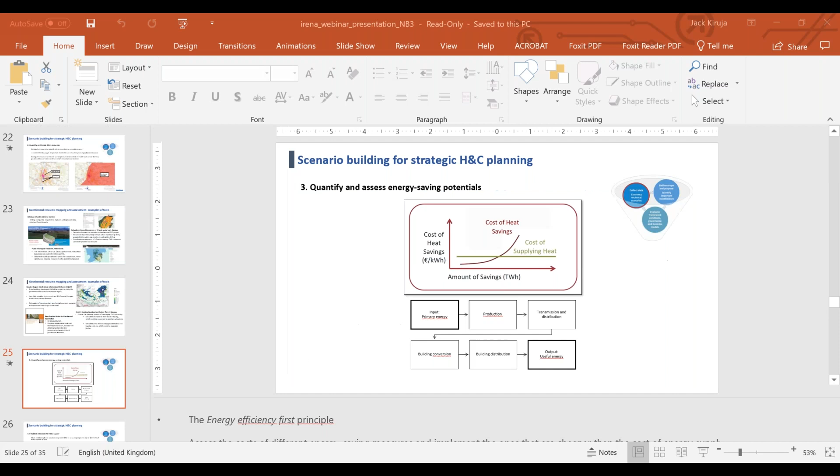As my colleague Gurbuz underlined, today's focus will be on the success factors for effective strategic heating and cooling planning. This is a crucial first step for integrating renewable energy resources, such as low temperature geothermal energy and solar thermal, into district heating and cooling systems. Cities account for two-thirds of global final energy use and a commensurate share of energy-related CO2 emissions. Air pollution, energy poverty, health risk, and climate change are challenges associated with current fossil-based energy systems, which could increase further due to rapid urbanization. More than half of the world's population lives in urban areas today, a share expected to rise to two-thirds by 2050. In terms of energy mix, we can observe that the transition is taking up speed.

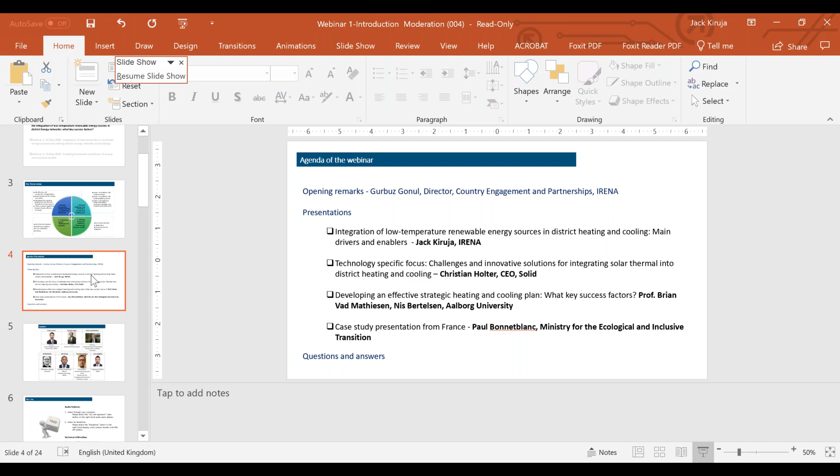IRENA's latest renewable energy statistics, released very recently, show that new renewable power accounted for 72% of all power expansion last year in the electricity sector, with 176 gigawatts of newly installed capacity. However, when we look at the heating sector, although it represents the largest energy end-use sector and accounts for over 50% of global final energy consumption worldwide, it is seriously lagging behind. As a matter of fact, at a global level, only 10% of heat is generated from renewable energy.

If we are serious about climate action and the clean energy transformation, heating and cooling require urgent action, especially in the cities context. The decarbonization of the sector is both technically feasible and economically viable. This can happen with a combination of national and local energy efficiency measures addressing the demand side, for example, by reducing heat demand through buildings retrofitting and optimization of technical building systems, and penetrating more renewables on the supply side. In this context, district energy systems are one of the ways to increase energy efficiency and scale up the use of renewables.

While reducing fossil fuel use in the heating and cooling sector in urban areas. Despite most systems still being operated on coal and natural gas, district energy networks provide promising opportunities for integrating low-grade renewable heat sources, including geothermal and solar thermal. According to the Global Renewables Outlook, just launched today by IRENA, the share of renewable energy in district heating may increase from 8% in 2017 to as high as 77% in 2050. Together with increased electrification, district energy can be a key contributor to the decarbonization of the building sector and to the transition towards a smart energy system, one that integrates smart electric and thermal grids and can offer system flexibility.

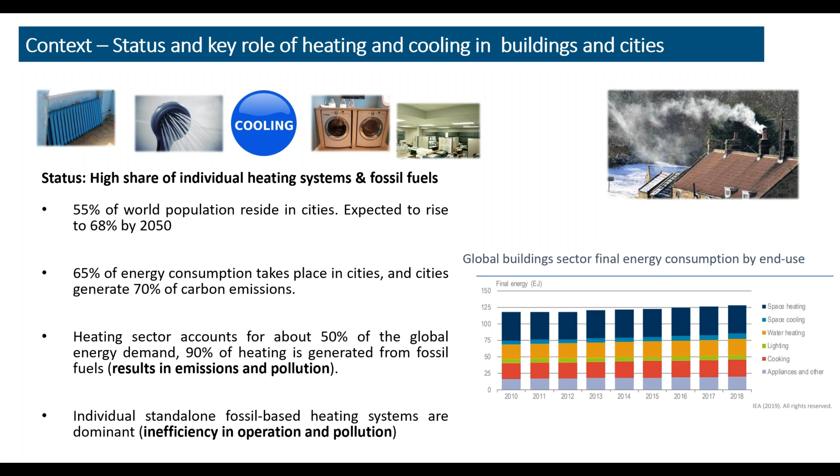Renewable energy sources such as biomass and high temperature geothermal resources can play an important role in certain limited areas, but their contribution remains negligible to date.

We see, however, a number of interesting developments when it comes to a gradual improvement in terms of efficiency of the building stock, and the development of low temperature district energy technology, running at lower temperature, which can be key enablers for a wider utilization of low temperature renewable energy sources, including from geothermal energy. These may otherwise remain unexploited.

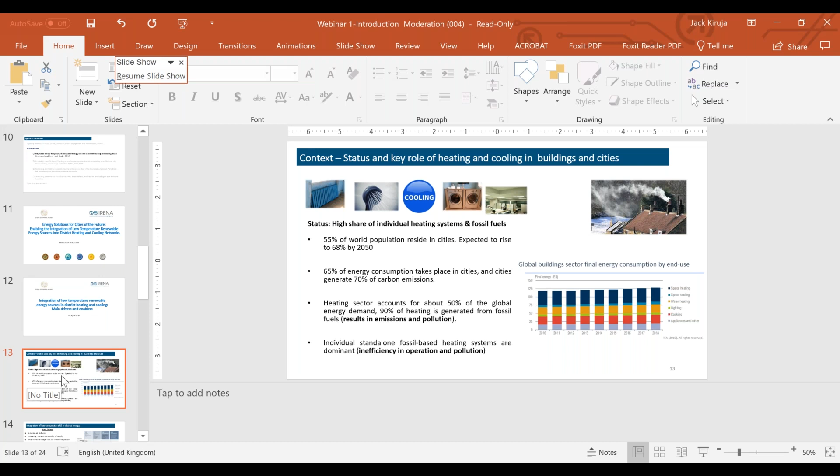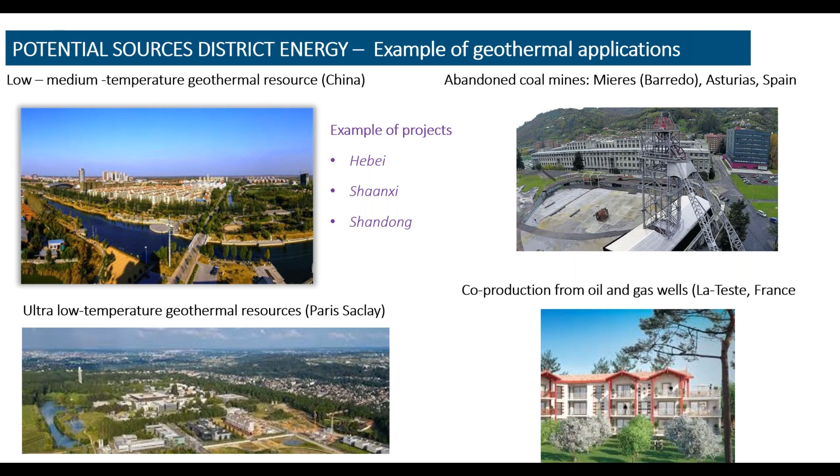They're using the resources in the shallow reservoirs through the use of heat pumps to provide heating and cooling for buildings. Another thing we're seeing is where geothermal energy is co-produced in conjunction with oil and gas, where the water is separated from the oil, and then the energy in this water is used to provide heating in the buildings.

Now, when we talk about developing district heating systems that can use these low temperature resources, we are confronted with different types of scenarios. The first scenario is where we have an existing settlement with an existing district heating system. These district heating systems are characterized by high temperature energy supply and also the use of fossil fuels.

For us to be able to use the low temperature renewables in these systems, we need to retrofit both the houses so that they're able to operate at a lower temperature, and also retrofit the district heating systems. The second scenario is where we have an existing settlement but without a heating network. In this case, we build a new heating system designed to operate on low temperature, and then on the building side, we retrofit the buildings so that they become compatible with these low temperature resources.

The third scenario, which is the easiest to develop, is whereby a new settlement is being developed. The houses can already be built bearing in mind that they're going to use low temperature resources, and the district heating system will also be developed to operate with low temperature resources. However, it's not a straightforward process.

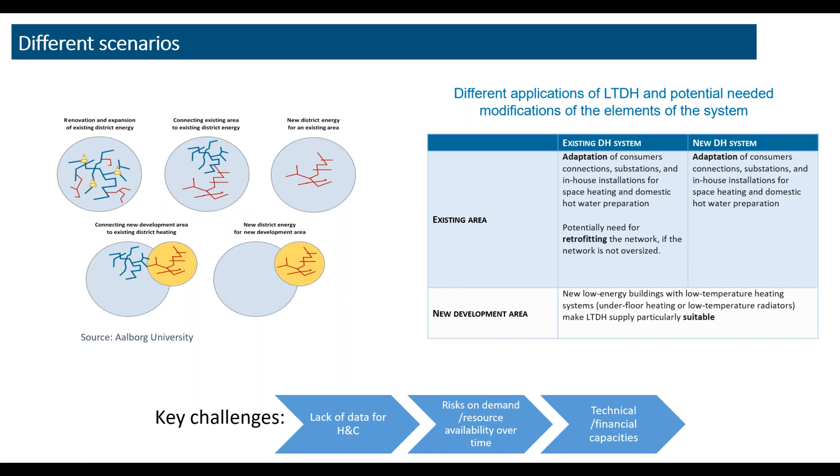As we go on with the webinar, we are going to see how some of these challenges are being addressed. Thank you.

Thank you very much, Jack. So we are ready now to have a technology-specific focus on solar thermal. The idea of our series is for each webinar to have a technology-specific focus. Today we'll have it on solar thermal. In the following webinars, we'll also focus more specifically on geothermal energy and perspectives for cooling.

We have now a presentation by Christian Holter. He's the CEO of Solid and one of the world's leading experts in the solar thermal market with more than 30 years of experience. Christian will be providing an overview of the technology applications from solar for district energy, including some challenges and solutions.

Okay, so please provide the screen to me. Here we go. Okay. You see my screen? Hello? Can you see my screen?

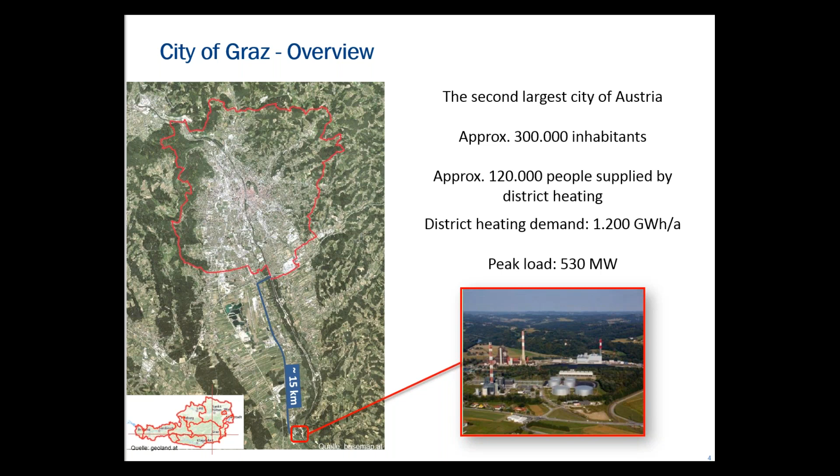But imagine you are responsible for a city with 300,000 people and many offices, business connected, and you get the message that you are losing 80% of your heat supply. Now, so in this emergency situation...

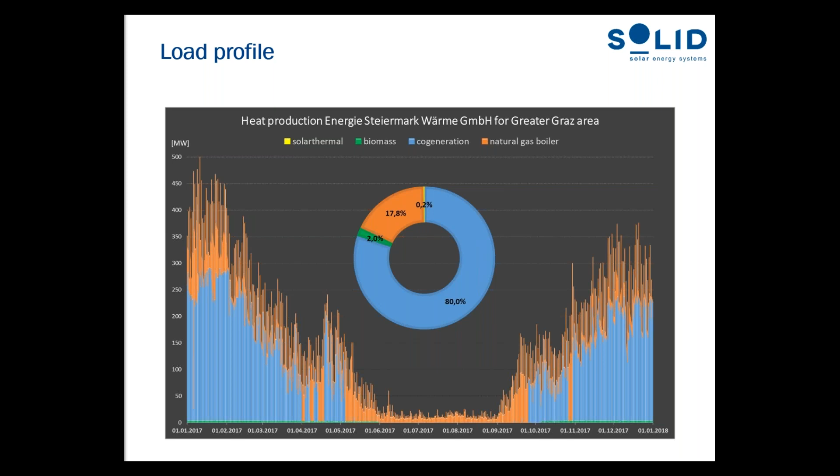The utility and the city and the local government came together and announced to form a working team. This working team started its work in 2013 to develop a full new approach for district heating.

It was done in a public process, so it was a call for contributions, and all technologies, all universities, all consultants were invited to present their ideas and concepts. It ended with 9 workshops, 150 participants, and 38 specific proposals for what to do.

Now, for sure, there were a lot of nice ideas which are close to the market. There were some ideas which are like a perpetuum mobile that don't work out. So the Graz Energy Agency worked to systematize and analyze all these proposals. 16 of them went into detailed evaluation, and as we talk today, 7 of them actually are implemented or are under preparation.

With those, this 80% of lost energy will be replaced, and the district heating system will be switched to renewables. So we have a very nice template case of coming from 80% coal plus 18% natural gas to a highly renewable system. Not everything in one shot, as you can imagine.

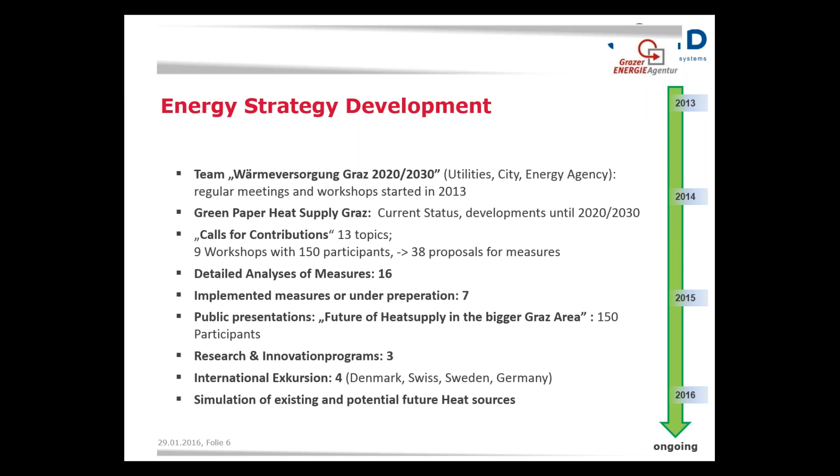So among those proposals, you can imagine there was a whole list of things we are aware about. I'll give you a little bit of the outcome of the discussion in the city of Graz on the specifics of all these opportunities.

Geothermal was off the table quite quickly. We don't have good sources for geothermal here. So it was actually not sufficient underground heat available to run geothermal.

Then there was a long discussion about heat pumps and potentially driving them by renewable energy like wind. At the end of the day, the outcome is there will be a heat pump taking advantage of the wastewater from the city, and some small heat pump projects upgrading low-grade waste heat to usable temperature levels. But at the end of the day, those heat pumps will be below 5% of the annual demand, simply due to the absence of sufficient low-grade heat.

And I can tell you there were studies done with ground source, with groundwater, with river water, with air heat pumps, all different types.

But there was a second issue as well. The wind and the electricity we need to use to power these heat pumps today in Europe have 85% fossil or nuclear energy behind them. And there was no vision for how this could be a kind of green energy within a reasonable period of time. There's so much to do to convert the current electricity supply, including mobility as an add-on potential, to renewables, that the vision of providing 500 megawatts in winter as heat with heat pumps was simply too far off. So heat pumps, yes, there's something happening, but it's not a major contribution.

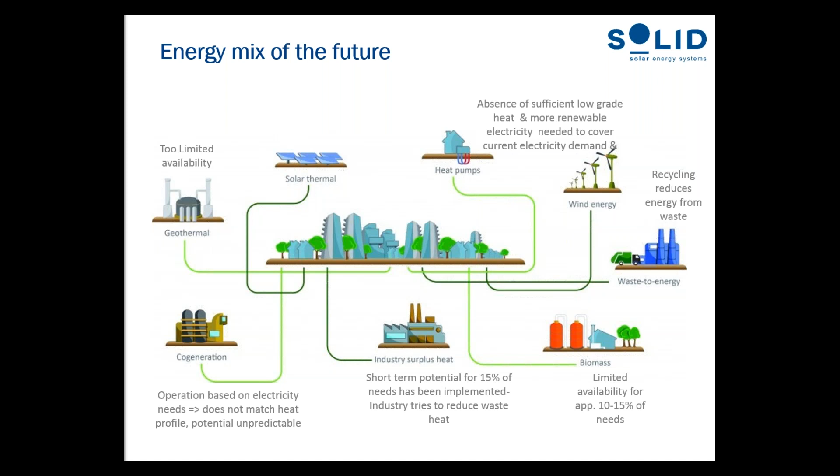Waste to energy was quite simple in Austria. We do have a lot of separation. All the plastics, all the paper goes to reuse, so it's not part of the common waste. And in the remainings, there is not really high energy content, and this is already used in 2 facilities. So if we don't move to import waste from abroad, or Italy, or some other neighboring countries, there was not sufficient potential there.

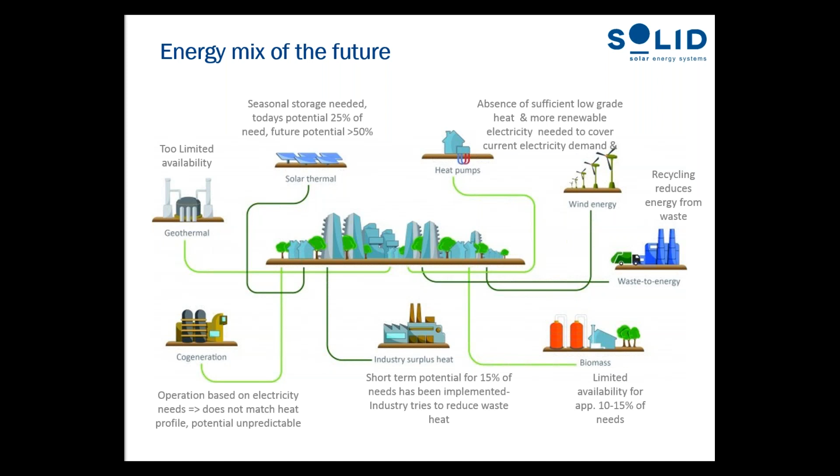Well, finally, if we come to solar, it is clear there is a total mismatch between the solar radiation on the one hand in summer and the demand in winter. So it was very clear it is only possible to use solar when you integrate a seasonal storage. Otherwise, you get stuck by some 3 to 5%, which is the amount you need to cover summer. But if you build a seasonal storage, and there was a lot of detailed studies done on that, there is already under today's situation a potential of approximately 25% of the need. And in the future, when the district heating net is upgraded and has lower supply return temperature, this potential probably goes to something like 50%. And here I want to go into much more detail now.

If you want to move to a higher fraction, you need to size it bigger. You need to build a bigger solar system. You produce surplus in summer, you put that into a heat storage, and this is then the energy you can use for the autumn, winter, and even spring months. And this is what we have studied here intensively.

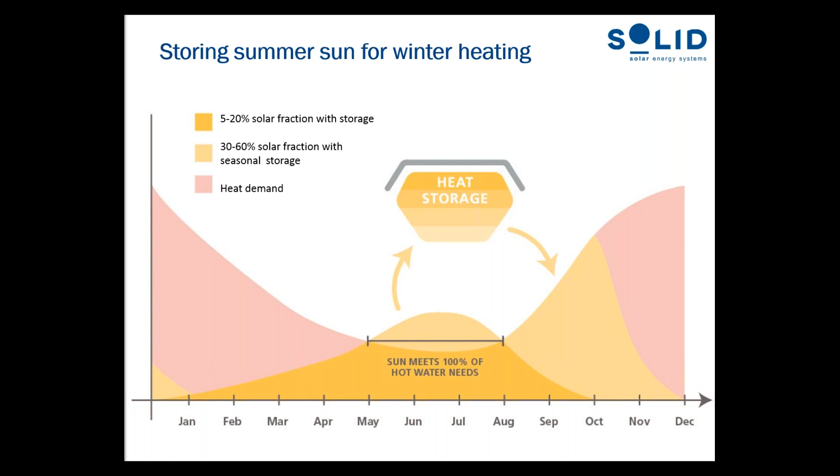So the results of the feasibility were the following. What was our key benchmark for that? Heat costs here were seen based on natural gas. At the time we started the feasibility, the full cost of heat, including boiler losses, transmission lines, and CO2 costs, was around 35 euro per megawatt hour. Now, the utility said if we move into a sustainable energy system where we know we have no risk of changes in energy costs, we can negotiate for a little bit higher cost. We can accept something like max 40 euro per megawatt hour.

And with this target number, we came to a solar field of roughly 450,000 square meters, providing 250 megawatt real peak power. This can partly supply directly to the city, especially in spring and autumn. And in summer, it feeds a seasonal storage that was sized at 1.8 million cubic meters. Then in the autumn winter season, the seasonal storage can be emptied in the beginning directly because you have 90 degrees C on the top, and you can send that to the city. In the later part of the season, we actually decided to use heat-driven heat pumps to take out the low-grade heat and really cool down the storage to 20 degrees C and lower. That system as a total provides roughly 20% solar share to the current infrastructure out of the solar field.

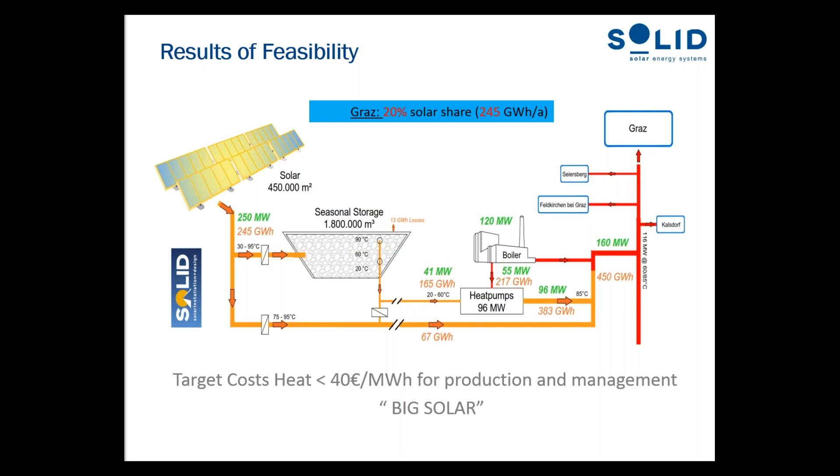Now, we learned a lot. What are the impacts for this project? What is helpful and what is essential to move toward economic and efficient solutions?

One very evident thing is the higher the temperature, the more difficult for solar energy as the storage, as a low-cost solution needs to stay below the boiling point of 100 degrees C or 212 F. So we need low temperatures in the district heating to achieve a high solar fraction.

As well, and this is more true for less developed places, automized control is quite essential. If people just operate everything by hand, it might be rather challenging in what they're doing.

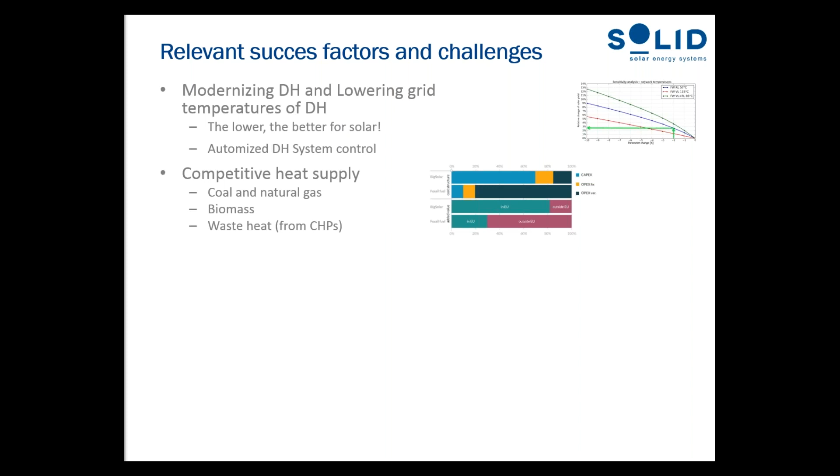Next, it's always depending what are your competitive heat supply sources. If you have coal, it's often rather cheap, and you need to really calculate the CO2 impact. You need to calculate impact on air quality by the coal dust to be competitive. If you work against biomass, we have seen the solar system is quite fine usually. If you work against waste heat, it really depends on how the waste heat is seen in the pricing and in the costs.

Another issue, solar heat needs land, because 1 square meter of place receives a certain amount of energy, depending on where we are in the world, something between 1,000 and 2,000 kilowatt hours a year. And you can harvest a certain percentage out of that. But at the end of the day, this is a clear need you have.

So we were actually searching in the beginning to find places which are restricted for other purposes. You do not want to compete with city development areas where they want to build industrial zones, where they want to build new houses, city extension. This land is quite valuable.

And so we were going for former landfills, we were going for water protection areas, we were going for side areas of traffic, everything which is restricted in normal use. What we learned as well is that it actually makes sense quite often to build a little bit of a longer pipeline to the solar system, because then you end up in areas with cheaper, easier to access land, and the overall economics of the project get better.

Another factor of success was if you build such a solar system with a seasonal storage, you quite immediately run into a situation where the storage is not a solar storage only. It is a storage where you can integrate some waste heat measures from other sources, where you could integrate some power-to-heat issues, which you can use for peak load shaving. You can, taking another measure, as we have a heat pump taking advantage of the low-grade heat from the storage, use this heat pump for flue gas condensation of the already existing or newly built heat boilers. So you get some other efficiencies out of that.

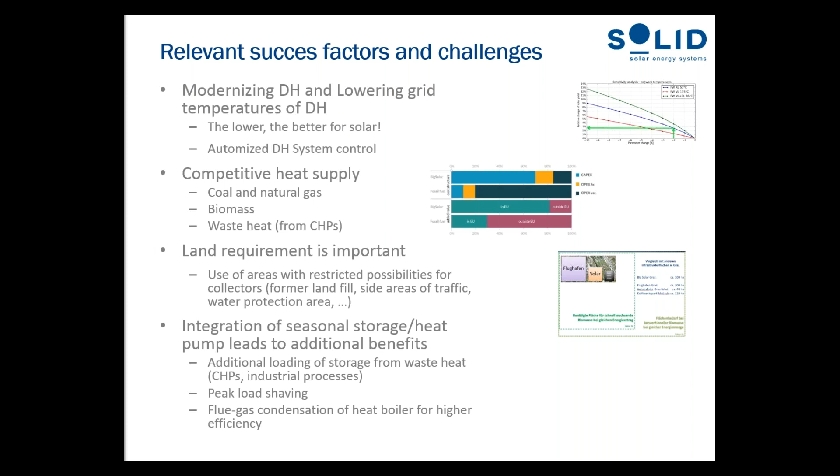Coming to the area and getting specific, the concept we developed here had a space demand for the storage and the solar collectors of approximately 100 hectares. Just to give you some comparison: the airport we have in the city has 3 times more space, 300 hectares. A motorway junction has typically something around 40 hectares. And quite interesting, the current generation plant with cogeneration there has a space demand of 110 hectares.

So if you compare the needs of solar, actually it is a kind of need in city planning, and it's a kind of political priorities. But we see other public infrastructure taking the same or even more space that is quite well accepted. Getting the right space for solar is definitely not an easy thing, and it's a real challenge for many projects. But if we have the right priorities on the political side, it's doable.

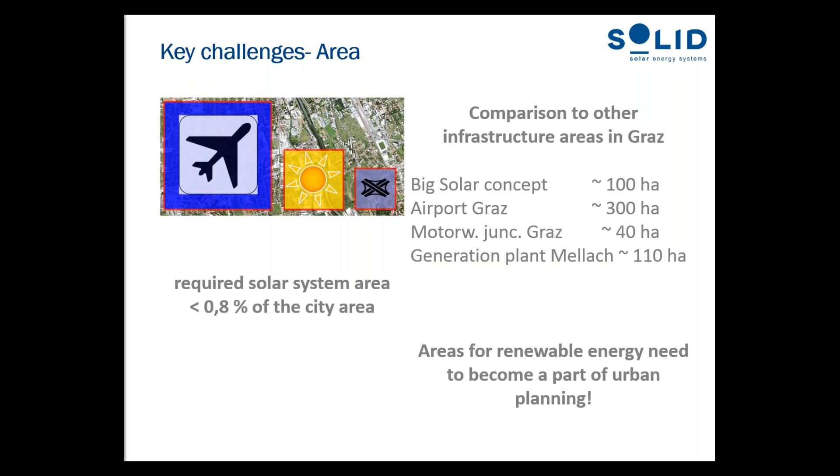We often get asked about the comparison between solar heat and other technologies in terms of area needed to generate a certain amount of energy. The numbers differ by location since solar radiation and wind vary, but here in Central Europe, you can harvest about 150 kilowatt hours from 1 square meter with solar heating. The same area with solar PV gives a little below 40 kilowatt hours, wind around 20, biomass around 5, and bioethanol and similar even less. So in terms of efficiency in area use, this is a very good technology.

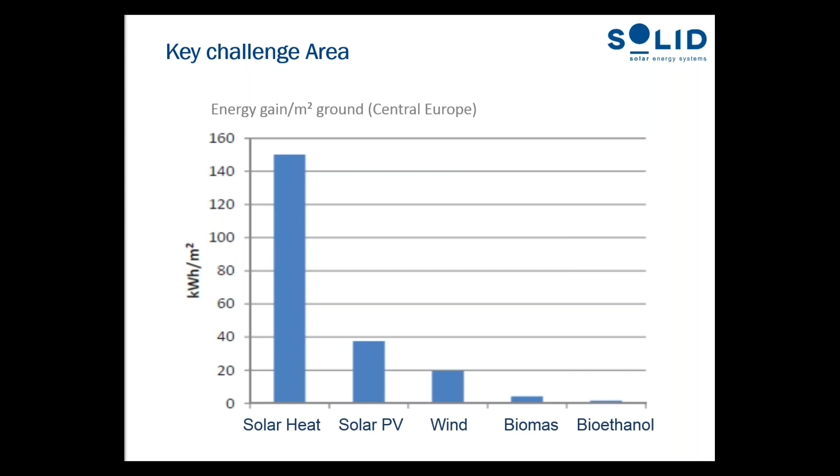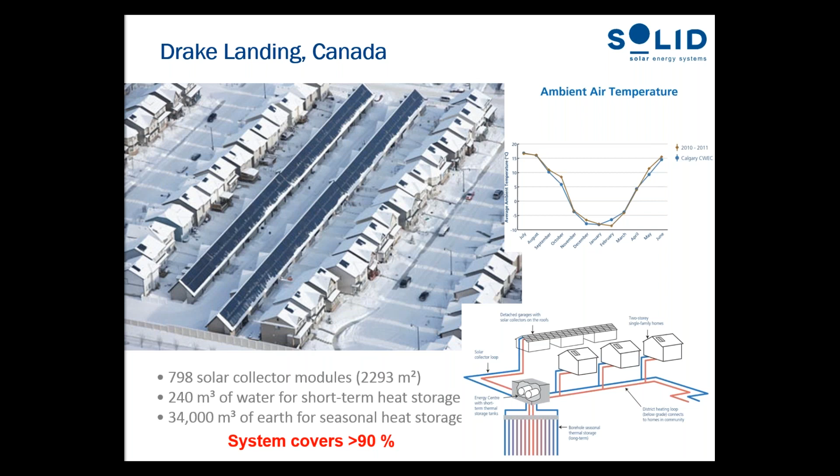Moving from theory to specific examples, I want to show you three of them. These have been done in small scale for several years. The oldest project, a lighthouse project just to prove the technology with solar collectors and heat storage under the ground, was built in Canada in a very challenging climate near Calgary, where winters are very cold with a long heating season. For a new greenfield development, they built a small system with 2,300 square meters of solar collectors giving 1.5 megawatt peak load. This system has been operational for 13 years, and in 10 of those years it worked 100% on solar heat to cover the demand of all the dwellings. Take that as an extreme example of what can be done technically. It was a pilot, not something I'd consider economic operation, but I like to show it as it demonstrates the potential when the technology is fully developed.

Now moving to Denmark, which we saw in the opening slides. Denmark has taken leadership in many of these projects. The small city of Vojens uses 70,000 square meters of solar collectors with 50 megawatt peak power, making up 50% of the city's overall heating demand. You see the solar collectors in the front of the picture, and in the back right, the storage with a black cover. This storage, with 207,000 cubic meters of hot water, helps balance between summer sunshine and winter demand.

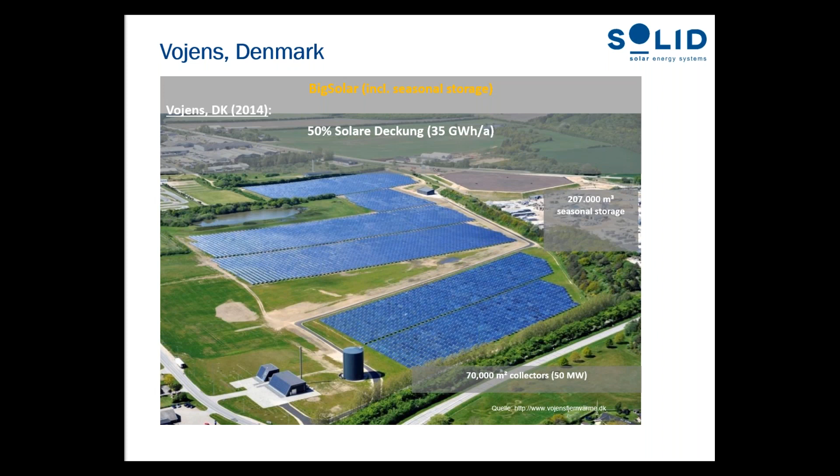Finally, going outside Europe to China, a system that started up a year ago is in Tibet, 4,800 meters above sea level. You can see the Himalayas in the background. There are no woods, hardly any biomass, and hardly any other renewable sources available. The interesting part is this system is designed to cover between 75 and 100% of the heating demand every month with a solar array of 22,000 square meters. I haven't seen the actual operation numbers yet since it's only been running a year, but in these high mountain climates you get extremely nice, clear sunshine in winter. So these systems get a lot of direct heating support, but the storage still helps shift between summer, winter, and cloudy periods.

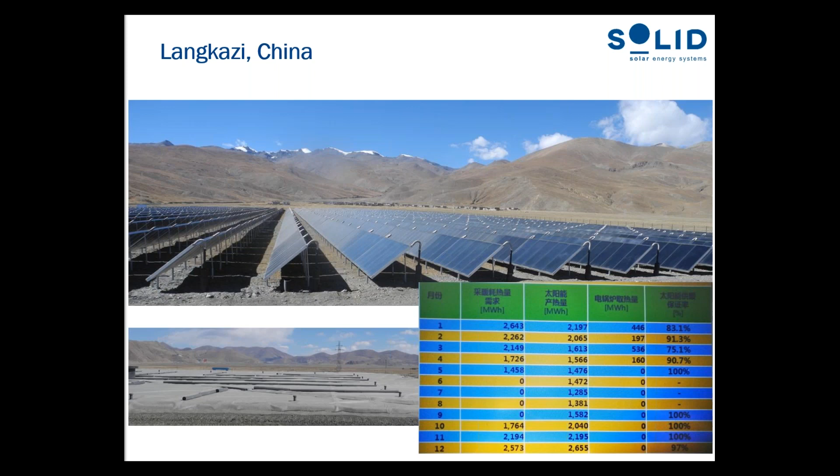All these systems have been smaller, supplying communities of several thousand people. With the Graz project, we took a step toward upgrading these systems in size, to integrate them into cities with tens or hundreds of thousands of people. Today we've worked on detailed studies and feasibilities for roughly 20 cities, showing major potential in economic competitiveness, land needs, and technical interfaces. I want to mention that the EBRD, European Bank for Reconstruction and Development, and KfW have launched specific programs to get these technologies moving and support the first lighthouse projects. Some Central European projects are already in the phase of preparation for implementation—negotiations for securing land, permits, and financing are ongoing, and I'd expect groundbreaking for several of them by 2021 at the latest, at a totally new scale, 3 to 10 times larger than current existing systems.

You've seen these systems work under different climates and interfaces to the existing environment. Going north to Denmark, there's heating demand even a bit in summer since it's much colder. Going to the Austrian mountains, it's similar. In the flatlands, there's no heating demand in summer at all. In the Western Balkan countries, a specific focus of EBRD, the heating season is very short, so you need a much bigger storage to cover a longer period. So all these systems have different backgrounds, but certain patterns emerge that make sense, and these projects need to be customized today to match specific demands—then they make a lot of sense.

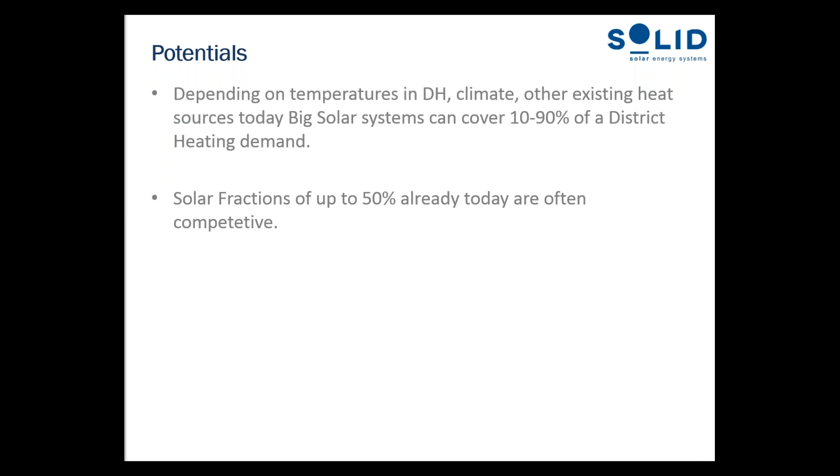Now, on the potentials, to summarize: even today on some systems, the solar contribution may be rather low because temperatures are too high or land availability is difficult. Some systems will be even below 10%, the max goes up to 90, but I would say something like 30 to 50% is doable in many places already today under competitive, economically competitive situations.

We did, together with district heating associations, some studies on what are the national potentials when we use the knowledge we have gathered in all these individual feasibilities, and move that to a European and global level. Austria, which is easy for us as a home base, we found that out of 24 terawatt hours used in district heating today, roughly 50% could be covered by solar in a 50 years approach on competitive costs.

We tried to make an estimate as well on a European level, and for sure the European level is very diverse. You have southern countries with hardly any district heating like Italy, Spain, or Greece. You have countries which have a long history of district heating, especially in the eastern part of Europe. We have the northern countries with extremely developed district heating. So all these approaches have different options.

At the end of the day, our qualified estimate was something like 200 terawatt hours, 30% of the district heating demand could be covered. We tried as well to say, what are the related investments to that? Well, that would be 70 billion euros. If you compare that with ongoing investments in the energy sector, it's surprisingly low as a 20 years target.

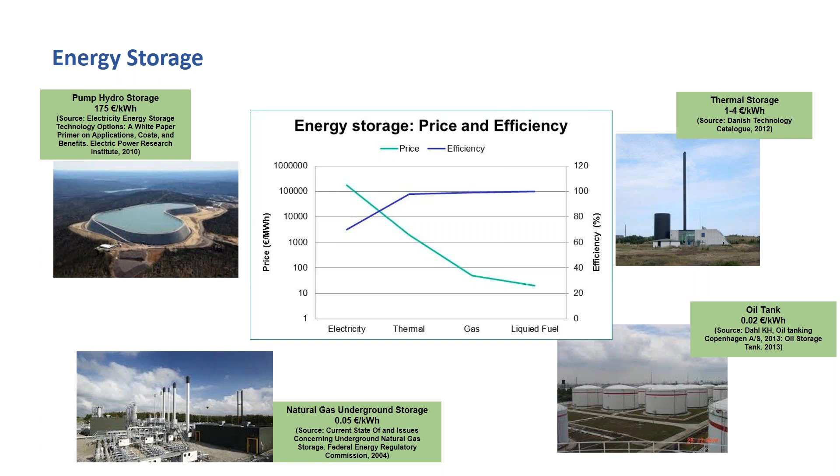Electricity storage can be reduced if we try to integrate the different systems. Here's another way to look at it: if we look at electricity storage, a cheap storage would be pumped hydro on a hill, and a very expensive storage would be a Tesla Powerwall. I would highly recommend that we try to avoid the Tesla Powerwall systems, and when we use pit storage, we use them at the right moments.

If we try to compare that with thermal storage, we can have a thermal storage at the household level that is almost 100 times more expensive than a very large pit storage, which is actually what we heard about in the previous presentation. So we want to go from electricity storage to thermal storage, but we also want to redesign our energy system, going from individual storage options to collective, societal, energy system storage options, because bigger is better in all means.

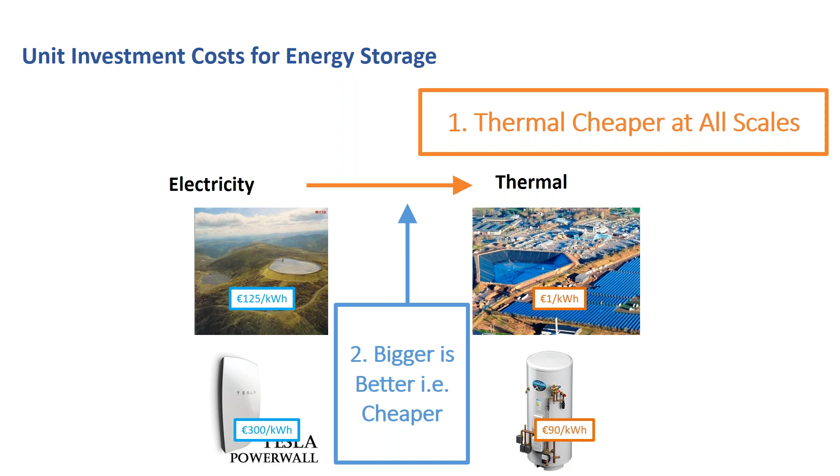This is what we found in the Heat Roadmap Europe project, that we're actually able to use a lot of this waste heat on a European scale. We can also use solar thermal, as we heard before, using district heating. We can use electricity via heat pumps, large-scale heat pumps. And of course, if we combine this with thermal storage, we're able to have a rather flexible system. This should be balanced, as I mentioned earlier, in a smart energy system with the end demand and with end demand savings, in order to reduce the needed energy, but also increase the efficiency of using solar thermal, geothermal, heat pumps, etc., into the district heating.

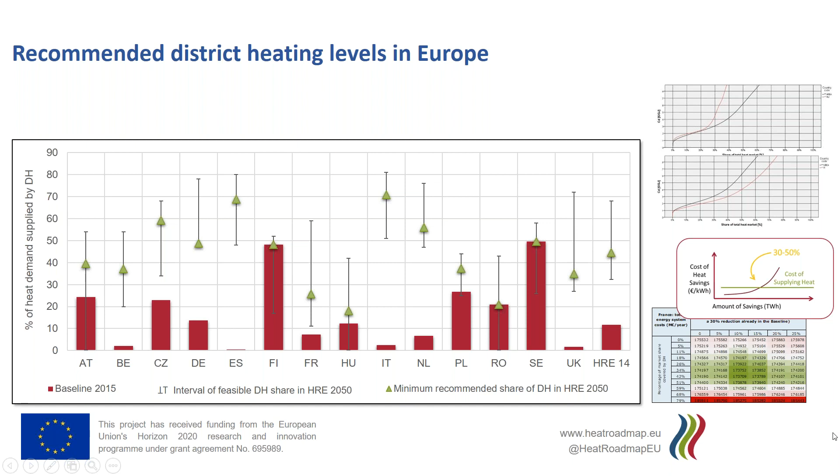And now I will give the word to Nis Bertelsen.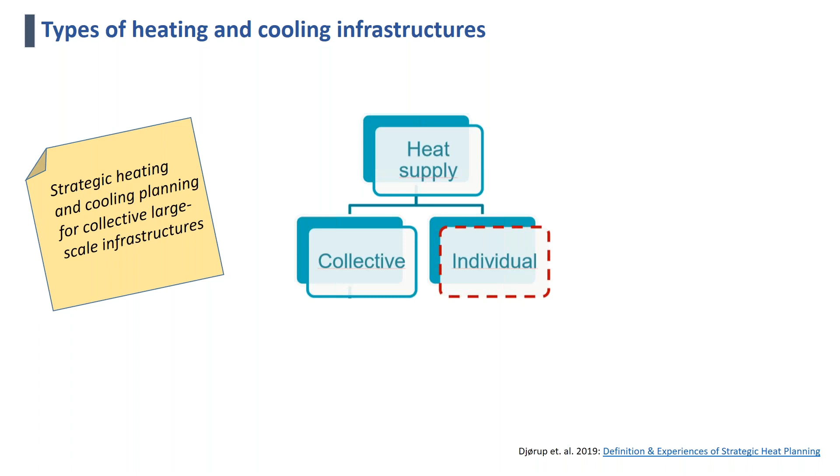We also heard about this 4th generation district heating and cooling, going towards low temperature district heating systems. And I will briefly mention that in this technological design, you need to look at both building systems, what is installed in the specific buildings.

We need to look at the grids, the distribution and transmission grids. We need to look at the supply side, the heat sources and cooling sources if we look at the cooling systems. And as Professor Mathiesen just talked about, we need to look at how heating and cooling fits into the smart energy systems or our energy systems.

And to combine these four aspects, we need to look at the planning and the concrete and specific implementation of 4th generation district heating and cooling systems.

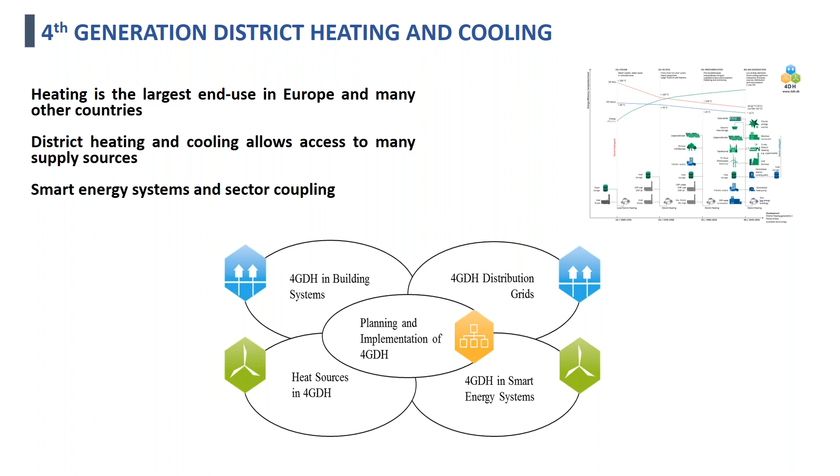So what makes heating and cooling special? I will say that heating and cooling are local demands. We need to know where they're located because we cannot transport heating and cooling very far, contrary to electricity and gas, which is quite easy to transport over long distances.

So this makes heating and cooling situated locally and often an issue for local governments. This also means that, as we can see, it's often been overlooked in national energy policy when you look at different nations' approaches to energy policy.

And if we do not treat heating and cooling planning systematically in energy policy and governance, then we risk two things. We risk missing out on significant sector coupling potentials from the smart energy systems, and we risk missing out on several renewable or very efficient heating and cooling sources.

This could be the ones we already heard about: solar thermal on a large scale, geothermal sources, excess heating, and so on. We can only utilize many of these using district heating and cooling grids to supply our cities.

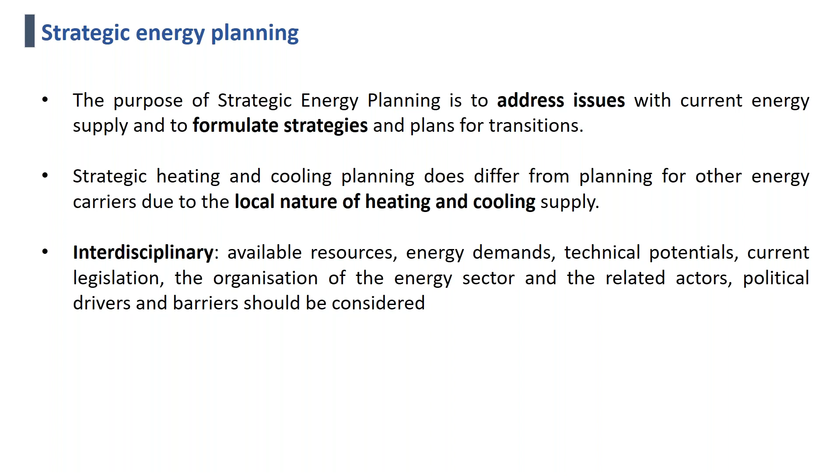Or a regional government has relations to the wider energy sector, the electricity sector, the gas sector, and so on, and national governments, and of course, depending on where you are, maybe the EU or other international authorities.

And to do strategic heating and cooling planning, it's important that there is communication and coordination between these different levels, so that the specific project level and the local government is able to communicate with the national government, regional governments.

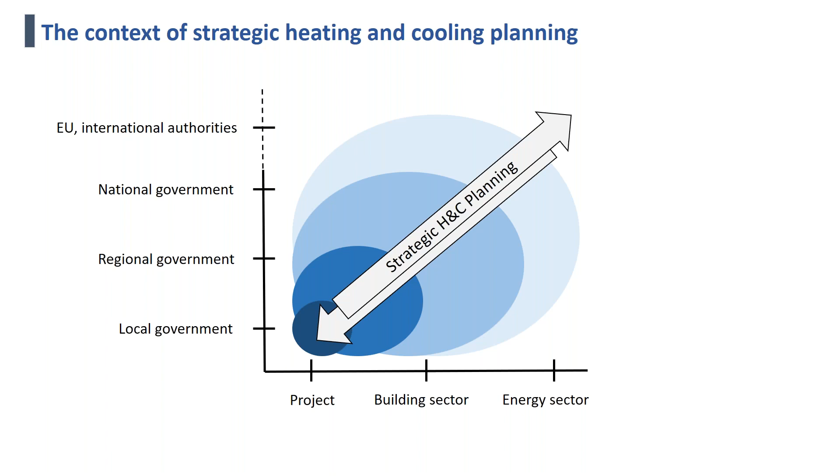And that they are able to take into account trends and developments in the wider energy sector. But the other way is also important, that the energy sector and the national government are able to communicate and translate their strategies and drivers down to the local government and the local project level.

Look at the technical scenarios. How do we construct these technical scenarios? Here it's important to look at energy demand, to look at potential heat supply or energy supply.

It is very important to look at savings and supply together. How do we balance savings and supply? And then based on this, we can start to establish some scenarios, some technical scenarios.

Third, we need to look at the framework conditions and business models. We need to look at ownership models. How do we finance these often very large investments?

How do we price the energy? And what kind of regulation is there and can help these projects move forward? And all of this together can result in a strategic implementation plan.

So the first part, looking at scope, purpose, and stakeholders. It's very important to identify first the drivers of this strategic energy planning process. I believe Luca already mentioned this in his presentation.

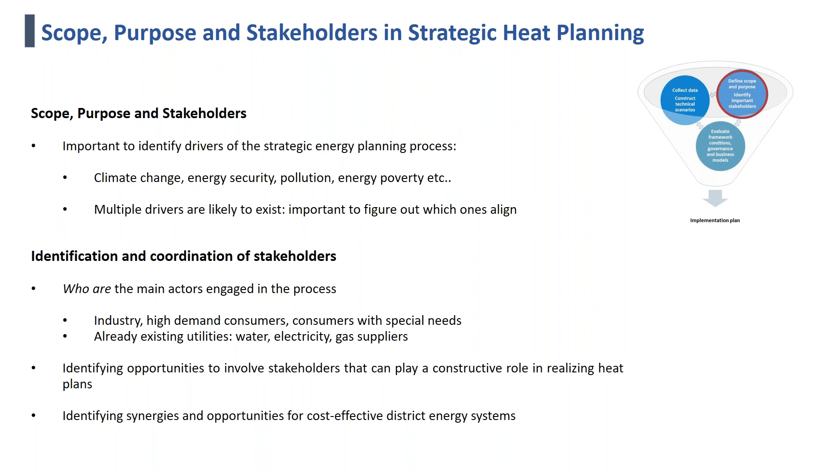Knowledge producers, researchers, academia, the developers. It can be excess heat suppliers. Of course, there's the customers and citizens. And then, for example, it depends on what kind of technology we're talking about. We just heard examples from the solar thermal field, but geothermal specifics can be geological surveyors, drilling experts, and so on.

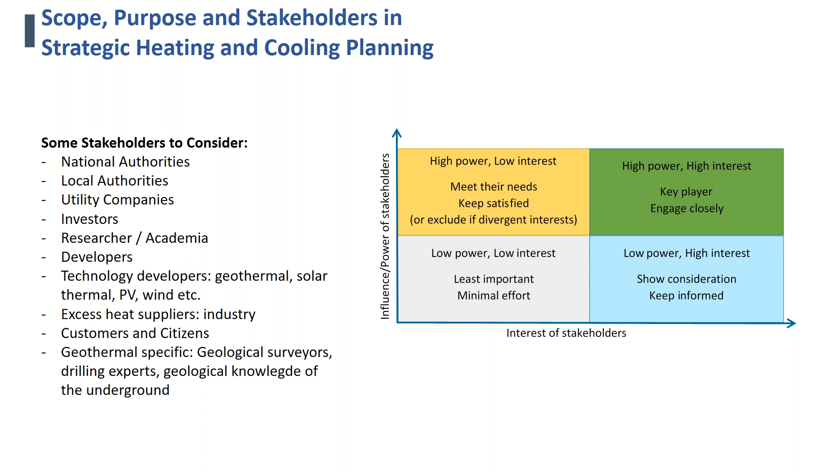We have a nice example here, which will also be included in the project report that will be published. It's a case example from Germany, a successful stakeholder engagement process from a geothermal project, which was made up of 4 steps.

First, they made a social site characterization, as they called it, looking at all the different views of stakeholders in the area - what kind of fears were there for this new technology, and what were the expectations?

Then they engaged in a more in-depth stakeholder dialogue, where they involved stakeholders more closely, making an advisory group of local stakeholders to inform the process and the project. Third, they made a broad civil engagement process, engaging the general public, providing a lot of information and resolving questions.

And fourth, which I think is very important, they made a follow-up survey afterwards, after realizing the project, to see what the residents and stakeholders thought about the project and about the process. They turned out to have quite high approval rates for this project.

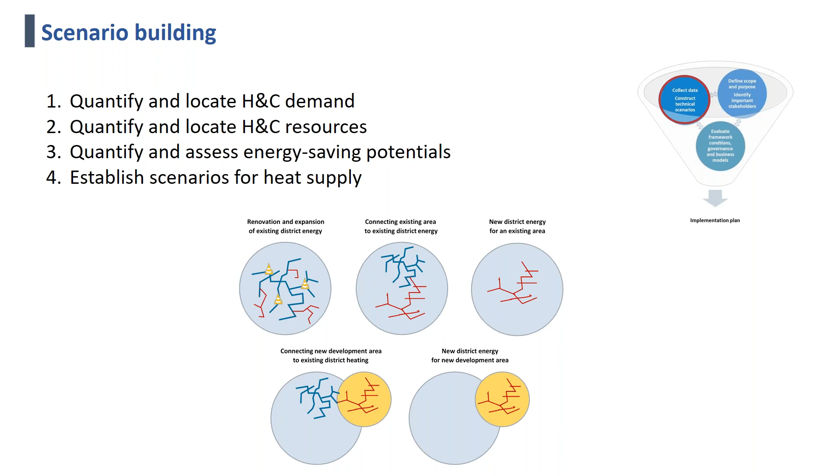But first, I will just say a few words on data availability, because it's crucial that we have good and reliable data. This is often lacking, especially for heating and cooling. Heating and cooling demands, for example, are difficult to measure because they happen in people's homes, and often they are not tracked and measured by either local or national authorities.

Ways to improve this include increasing measurement, for example through consumption-based billing. This can also lower energy consumption and increase knowledge of the quantity and demand and where the demand is located. Of course, this requires some investments in metering equipment, but this data is crucial to making reliable plans.

It's also very important to share this data and provide open access so we can learn from each other. And it's important that we know and have reliable data about our supply side. What are the different sources which we have available? Wind, solar, geothermal, biomass, and so on. So how can we design our supply side?

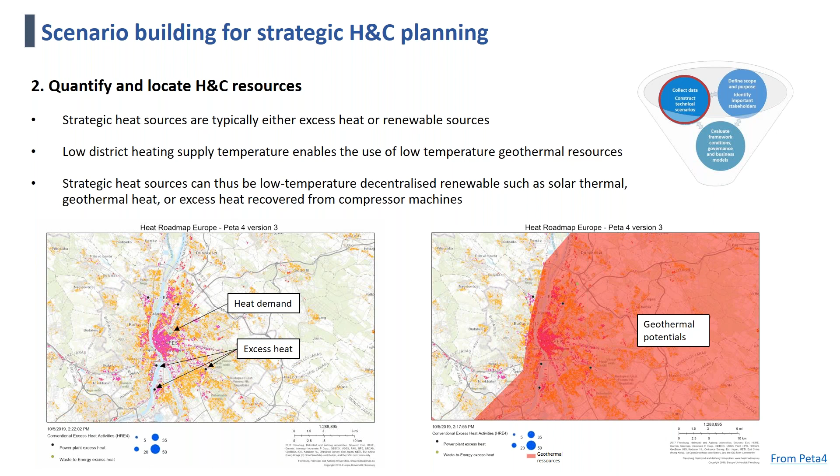And with this, I will briefly give the presentation to my colleague Jack from IRENA, who will talk a bit about geothermal potentials. The floor is yours, Jack.

Thank you very much, Nis. In the next two slides, I'm going to discuss examples of tools that are available that cities can use: first, to acquire data for geothermal resources, and second, on how this data can be used to guide decision making.

As we all know, acquisition of data for geothermal purposes is first of all a very expensive venture. It takes time to collect this data, and also it requires highly specialized skills, which sometimes may not be available in most municipalities within their workforce to do that.

In this regard, we see some initiatives by some countries that they're employing to enable them to collect data for geothermal purposes. The first initiative is in Geneva, where drilling companies are required to register the characteristics of the underground through a database. The kind of information they provide includes the temperature distribution in the underground, as well as the geological formation of the underground.

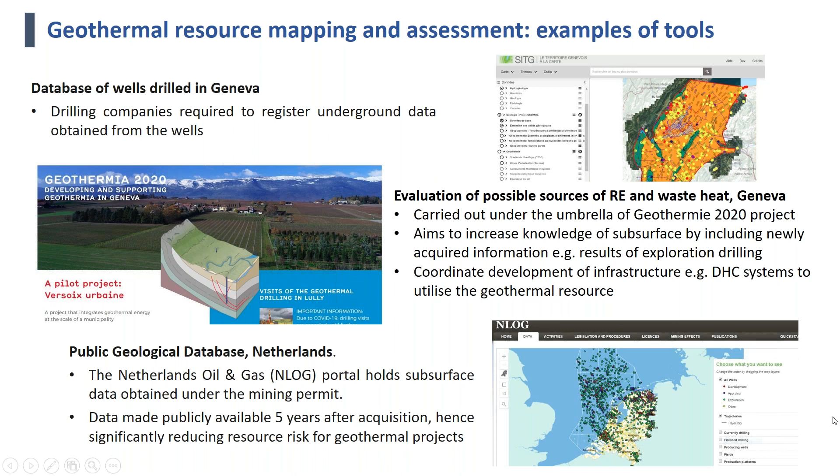Now we're also going to look into how this data, once it's acquired, is used to guide decision making. We're going to look at a couple of examples.

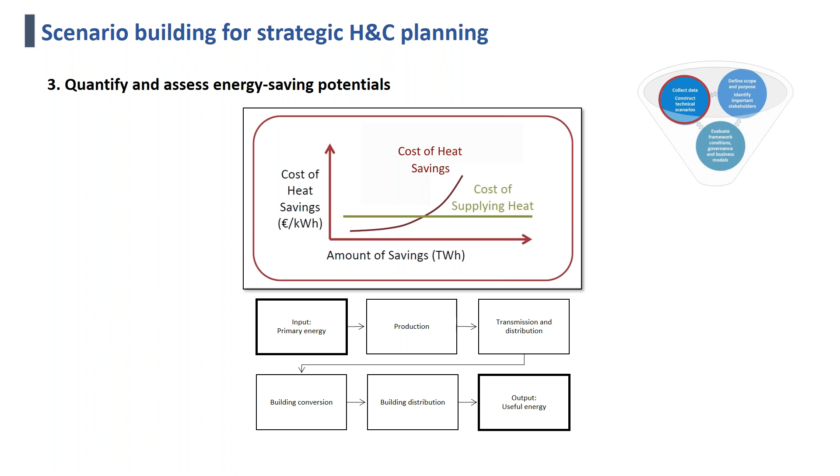So now we can move on to establishing these scenarios. It's important that you keep in mind the scope, and with that I mean, even though it might be a heating and cooling project, it's important to keep in mind how it fits within the wider energy system. How does it translate into electricity demands? What is going on in the electricity and gas sectors, and so on?

And what is the time frame of this scenario? I would recommend that you take a long time frame. Look towards, for example, 2050, towards a 100% renewable energy system, and look at how this scenario, this plan, fits into that future.

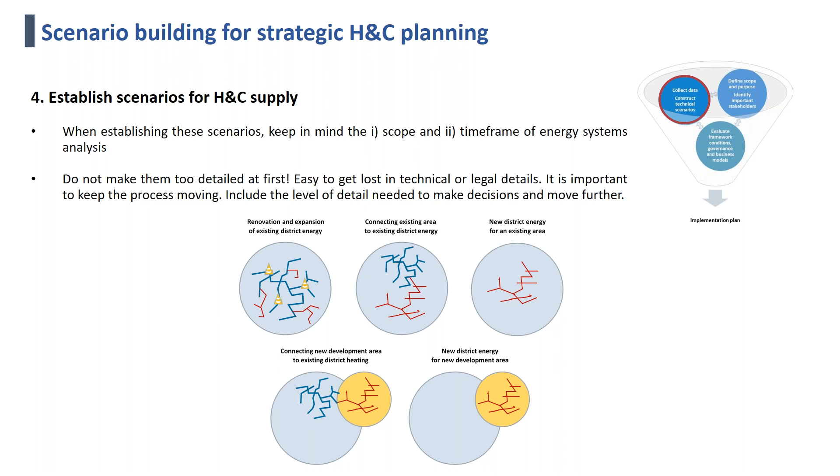And if you want to enable action, then perhaps don't make them too detailed at first. It's important that such scenarios are also able to interest your stakeholders, so you can go back to them and see how they fit into these plans. It's easy to get very lost in technical and legal details without having the full support of your stakeholders, for example.

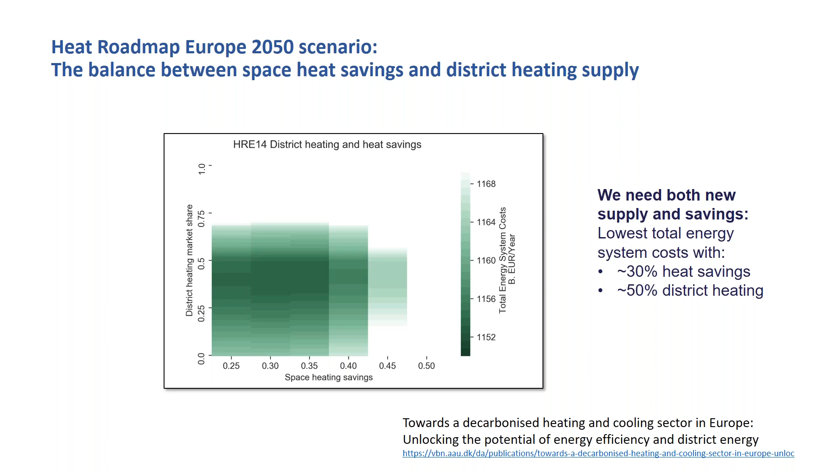Then I have a few methodological points, some we've touched on already. The energy system scope is important - include the entire energy system to identify these potential synergies. Good quality data is very important. A long time frame is important. Make sure the scenarios align with long-term targets, so they fit into a decarbonized future.

Then it's important we differentiate between socio-economic and business economic costs and prices. Taxation, subsidies, externalities, and so on influence the result. We need to use costs that are relevant to society and not necessarily supporting the status quo, which might be in favor of fossil fuels. Here we have to remember that strategic heat planning is not business as usual, because we are trying to transition away from a fossil fuel system, which is the status quo of today.

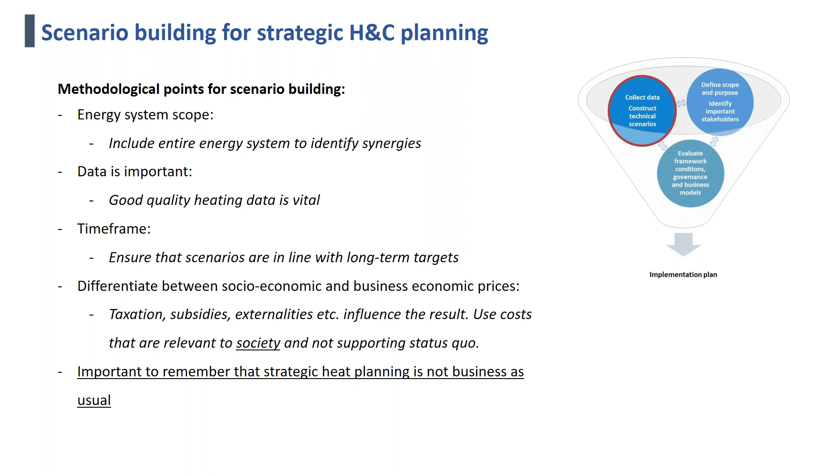Then a few words on enabling framework conditions, finance and business models. It is very important to be sensitive to the ownership structure - who owns especially the infrastructure? How are heat and cooling priced? What pricing mechanisms are being used? What kind of regulation is being used? And how do we finance these investments? This is such an important topic that we will address it in a further upcoming webinar, May 25th. So here I will just say that these aspects are extremely important to look at.

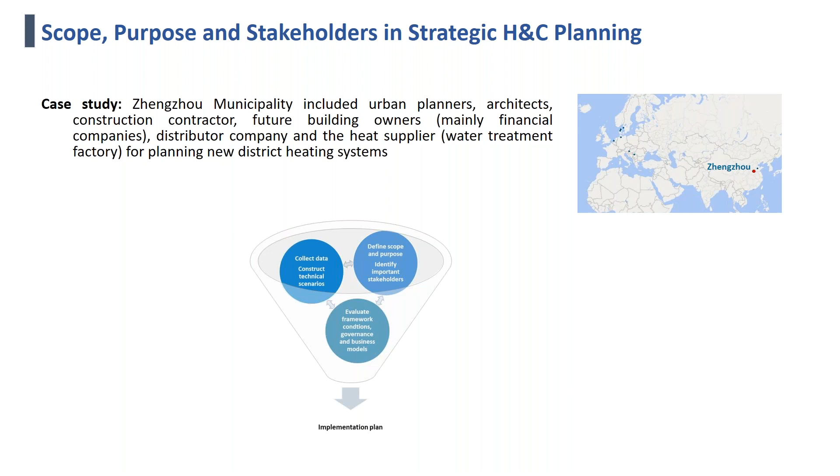Here I have a quick case study from China, where they have addressed these three parts of making a strategic heat plan. So the scope and purpose - they had the drivers. They wanted to replace all coal-fired energy production within the city, increase energy efficiency in buildings by 15%, and reduce air pollution levels. This was what was driving the project forward.

So what was the framework and financing? They had a public endowment fund that enabled them to recirculate some of these funds into new district heating investments. This is very important when you start with, for example, the low-hanging fruits - exploiting cheap excess heat or supplying heat to very heat-dense areas or heat demand-dense areas. Then it's important that you recirculate the funds from these projects into making new district heating investments.

They also made technical scenarios where there was an interaction with buildings. They included energy savings, and they included wastewater heat supply in the technical scenarios. So this is how this plan involved these three aspects to come up with a plan.

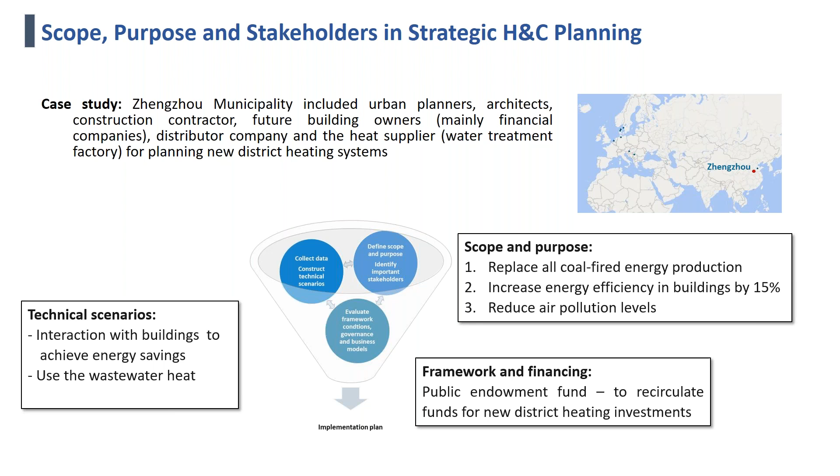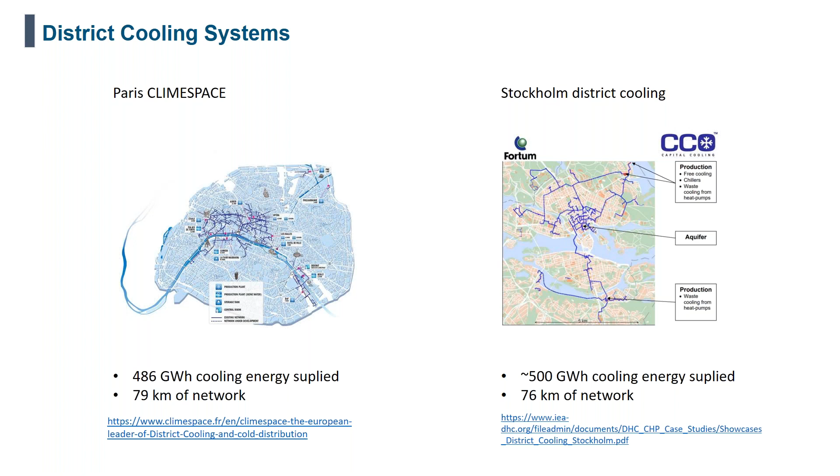Then I have a few examples of district cooling systems. If you are interested in this, there are large systems both in Paris and in Stockholm. They're actually of similar size - around 500 gigawatt hours of cooling energy supplied each year, and just below 80 kilometers of grid networks. So there's two links here if you're interested in these projects.

I will end by saying that strategic heating and cooling planning is an iterative, multidisciplinary, continuous process, where perhaps you start with defining scope and purpose, you look into technical solutions and scenarios, you look into the framework conditions, but you will likely have to go back because this translates into new scopes and purposes. Perhaps new technologies are being discovered, new stakeholders are interested, and so on. So it's a continuous process.

And what are the key success factors? I mentioned these before, but it is: identify main stakeholders, identify the drivers in your scope and purpose. For technical scenarios, it's important to look at heat demand and good data sources.

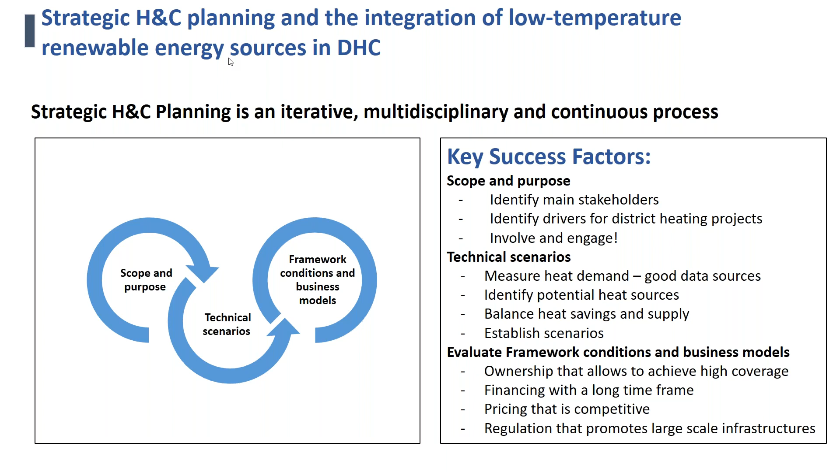Look at the ownership that allows you to achieve a high coverage of district energy. You use financing that can have long or support long time frames, pricing that is competitive, and regulation that promotes these large-scale infrastructures. And with those words, I would like to say thank you for your attention for now.

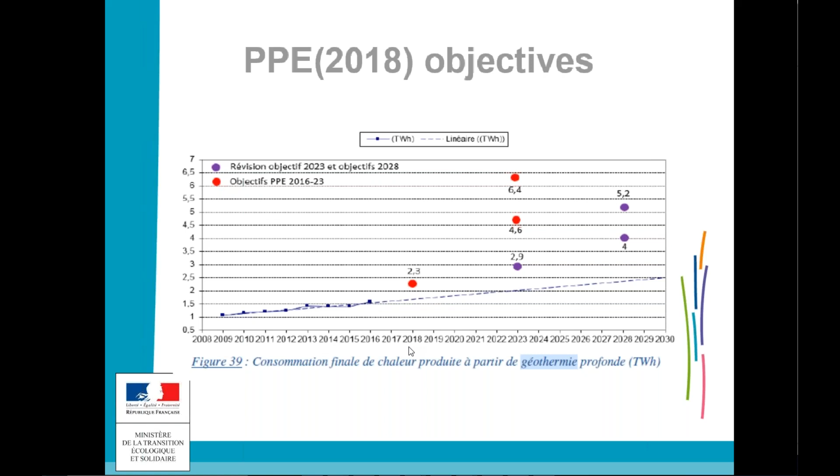A little bit also just to know the economics in France for geothermal energy. We have figures for 2014, a study by ADEME, the French agency for energy management and environment. The total budget for deep geothermal facilities for district heating, low-temp, is around 50 million euro per annum. That figure is for 2014, and probably a little increase up to a maximum in 2016, and probably reduced a little bit. But that's the pace we have right now, more or less, to have the trend seen on the curve I showed you just before.

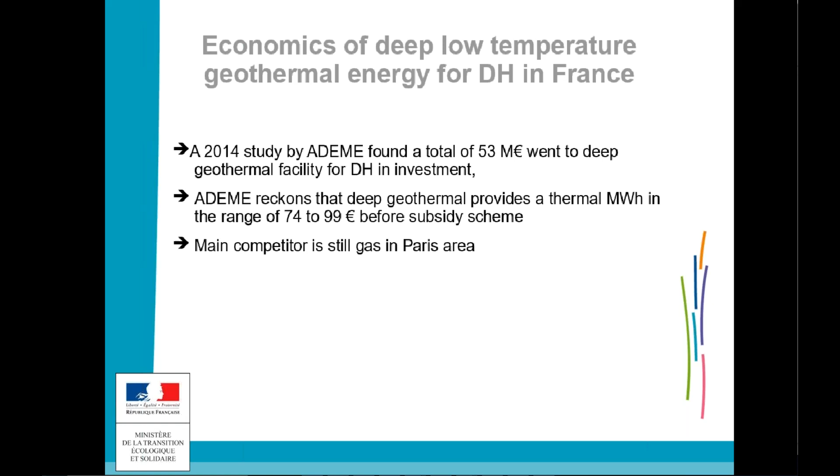In terms of price, before the subsidy scheme, it's around 74 to 99 euro per megawatt hour. And just to give you a basic idea, the main competitor is still gas in the Paris area and in some others, even though in the Paris area the geothermal resource is well mastered.

So geothermal, we revised the regulation mostly from the mining code point of view, to allow sometimes assessing the resource in difficult areas. When I say difficult, I mean the geological context is a little harder to appraise than in the Paris area. For instance, in Alsace we have that case, but it will work for some other areas too. I'll show you on the map later.

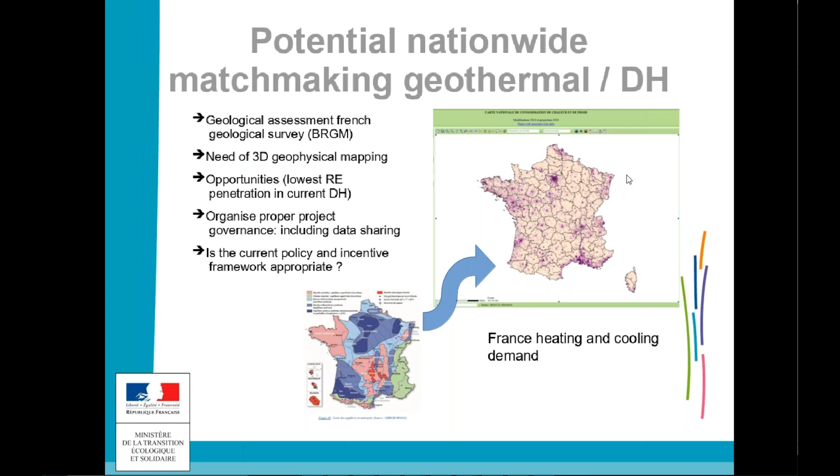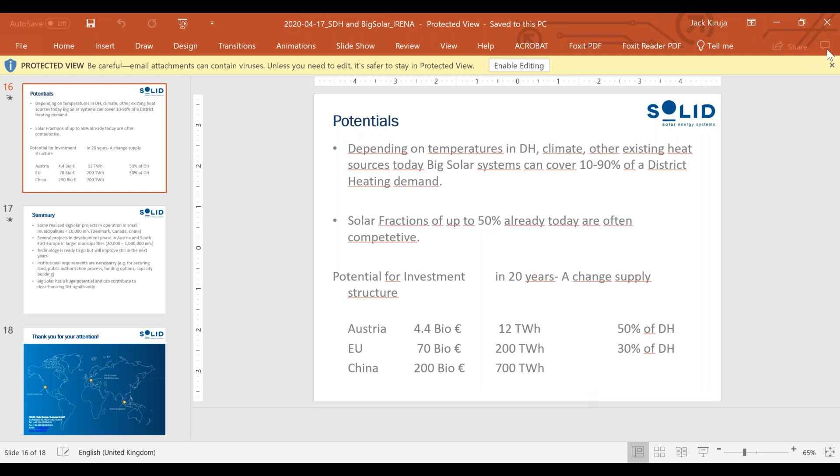Just one question about clarification of what possible excess heat sources are available, and I can reply to this already. We may refer to large industrial installations, waste heat coming from industrial processes, from cogeneration plants, coal-fired power plants, gas-fired power plants as well. There may also be a possibility to recover and utilize heat from nuclear power plants. This was also one of the questions we received - what are the safety measures in place to utilize excess heat sources from nuclear? We'll try to respond to this specific question in the next webinar.

We also have other sources of excess heat. Excess heat may come from data centers. It may come from refrigerators in supermarkets, being stored, for example, at decentralized level and reutilized either immediately or in another season through seasonal storage. So we have a number of excess heat sources that may be utilized in the context of low temperature district heating.

We also have a question regarding the importance of energy savings, which are very crucial in the context of the energy transition in the building sector, together with district heating. The question is how energy savings can be addressed at a local level, especially when the local authorities have limited powers.

But I would extend this question and expand it a little bit to all the participants, asking how it is possible to improve the coordination and cooperation between the national level and the local level, including in terms of heating and cooling planning, but also going more into the possible deployment of projects. How is it possible, in 1 minute, to improve coordination and cooperation between different governance levels, as we have discussed strategic heating and cooling planning? We may start with our colleagues from Aalborg University, Professor Anis. In 1 minute, if you can provide us with a brief response to this question.

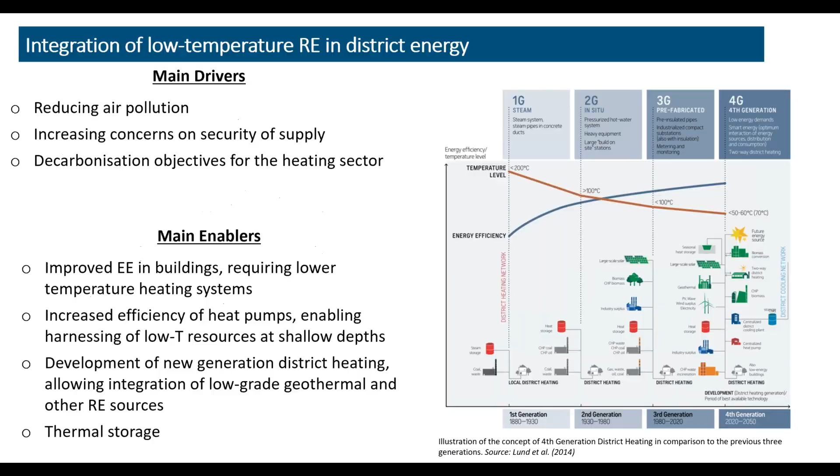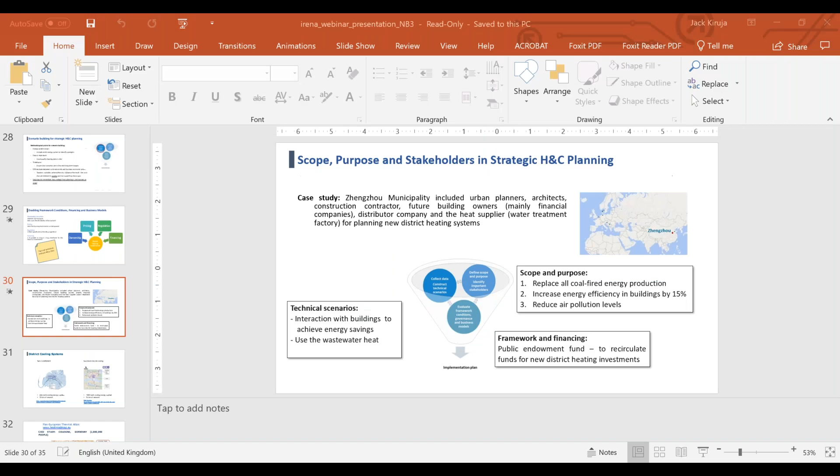Yes, thank you very much indeed. If I may go back to complement the feedback received so far: in the beginning we showed some of the major areas of intervention we may want to touch upon. I think a key one, when it comes to technology-specific barriers, relates to limited capacity at public level for certain technologies—how to address demanding licensing procedures, streamline administrative procedures, and create the workforce required, for example for geothermal energy in some developing or emerging markets. These are technology-specific issues that may be addressed at the national level, where national support can help make innovative technologies more competitive with conventional sources.

That being said, I go to the next question, which is for Christian. Christian, can you briefly clarify why the solar thermal needs 4 times the area required for PV in one of your slides, considering that the efficiency of thermal panels is higher than PV?

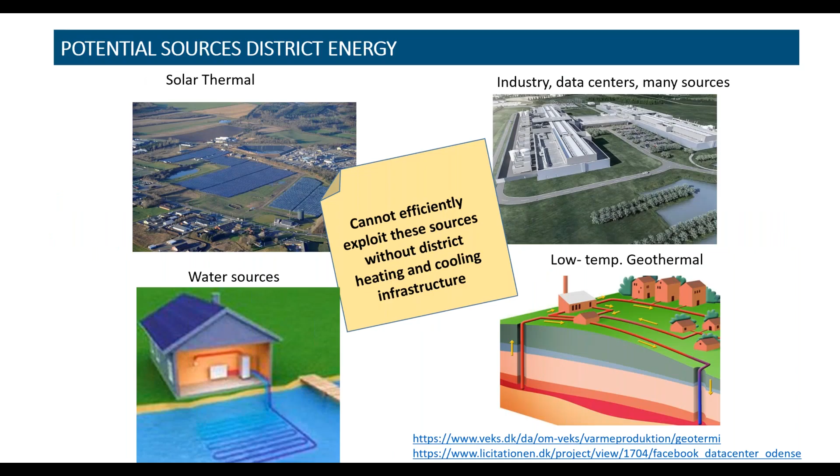Thank you very much indeed. So we have many questions, and we propose to use some of these in the next webinars—it will be very useful to prepare those two webinars. Some are related, for example, to de-risking geothermal projects: what are the major possible instruments? One has already been presented by France, a well-productivity risk insurance system for the short and long term. We have similar examples in the Netherlands.

We have other, more project-level approaches elsewhere. I may mention a project run at the European level called GeoRisk, where this topic is especially addressed. We invite interested people to look into this project, and we'll also touch upon this issue during our third webinar when we talk about financial instruments.

We also have questions about the possible participation of citizens and cooperatives in district heating projects, and about how we can use solar thermal or other decentralized installations to feed heat or excess heat from the consumer to the grid—the prosumer approach. We'll address all these questions in our third webinar when we talk about business models, regulation, and financing. Please follow us, and we will address as many questions as possible in the next webinars, which take place on the 14th and 25th of May.